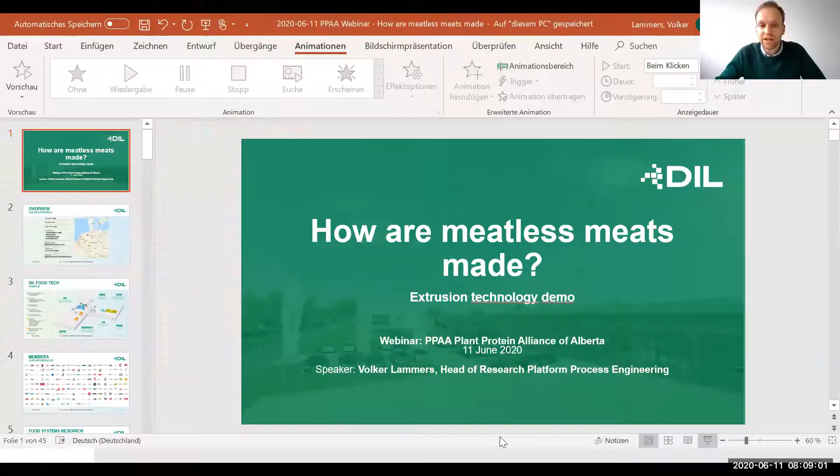Thanks again to PPAA for considering me as a presenter on this interesting topic. I'm pleased to present to you today, and it's great that so many people joined this webinar today.

So the topic is how meatless meats are made, and this presentation will hopefully give you a good overview of extrusion technologies, and how extrusion can be used to prepare meat analogs or meatless types of meats.

I will also share a few videos showing and demonstrating the technology. First of all, I would like to give a brief introduction of DIL, our institute.

DIL stands for Deutsches Institut für Lebensmitteltechnik, which is a non-profit research association located here in Northwest Germany, close to the Dutch border and the North Sea.

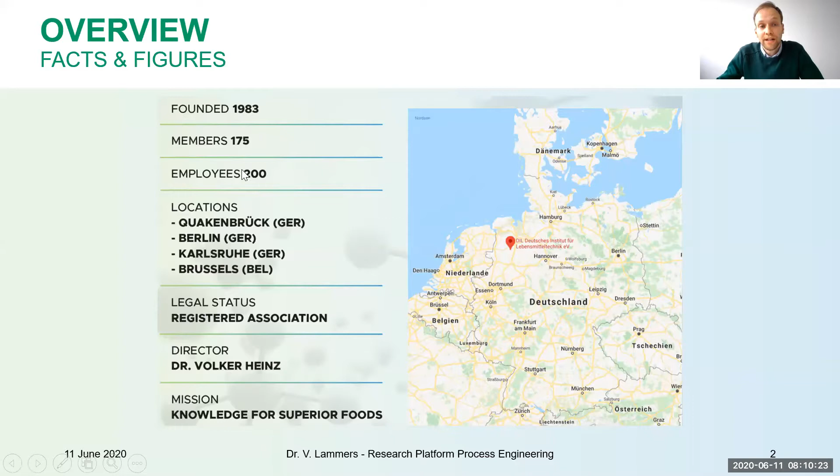Founded in 1983, we have approximately at the moment roughly 200 employees. Our headquarter is here in this lovely little city Quakenbrück.

We also have offices in Berlin, Karlsruhe, and Brussels, and now more recently one office in Calgary - that's Karin. So that's also how the connection to PPAA was made.

Our director and my boss is Dr. Volker Heinz. The specialty about DIL is our legal status as a registered association, and I will show this in the next slide what this means.

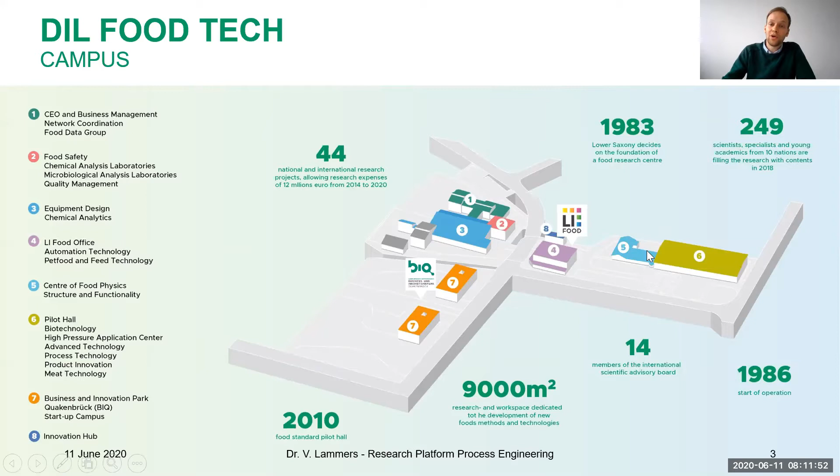Then we have our pilot hall for food innovation and process engineering, and this is where my team is also located.

As just said, we are a registered association, meaning we have roughly 180 members. Those are mainly companies from the food, feed, and beverage industry, but also machinery and equipment manufacturers, and companies from the area around - small, medium companies, but also startups and large enterprises. Everyone can become a member of our institute.

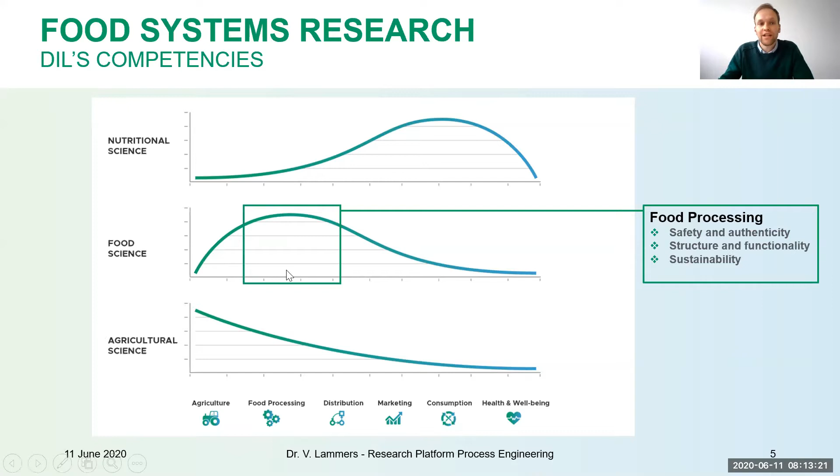So what are the main topics we're dealing with at DIL? It's food technologies. If we look at this graph, basically in the food system we have the nutritional sciences, the food sciences, and agricultural sciences. DIL is mainly located here in the area of food science, focused on food processing. We say, okay, it's everything from the field until your mouth, until you eat it. Then we need to make the link to the nutritional sciences - this is our core competencies.

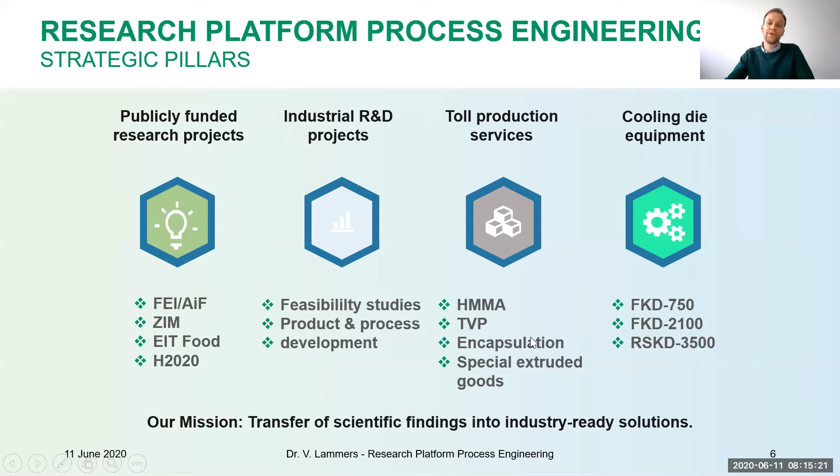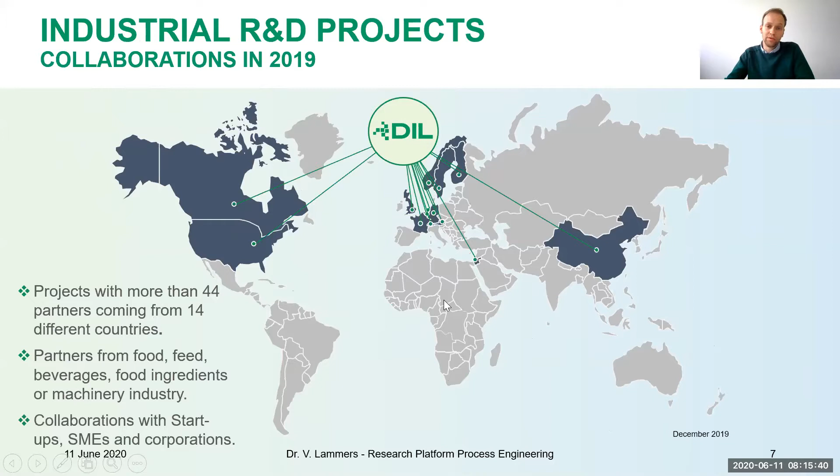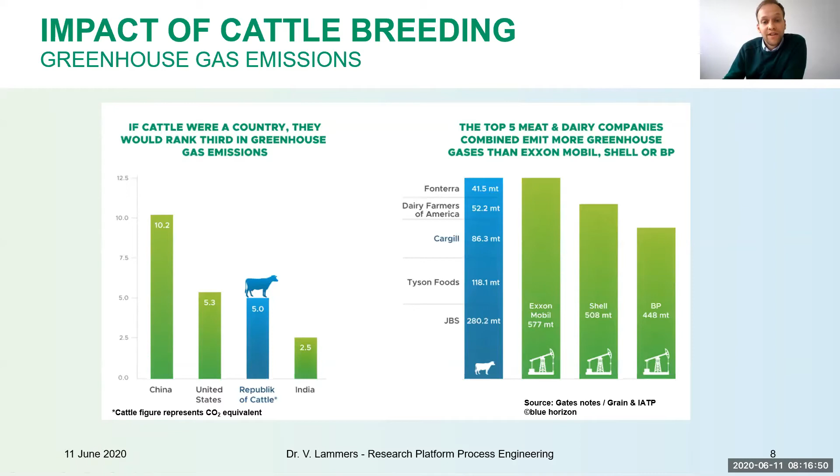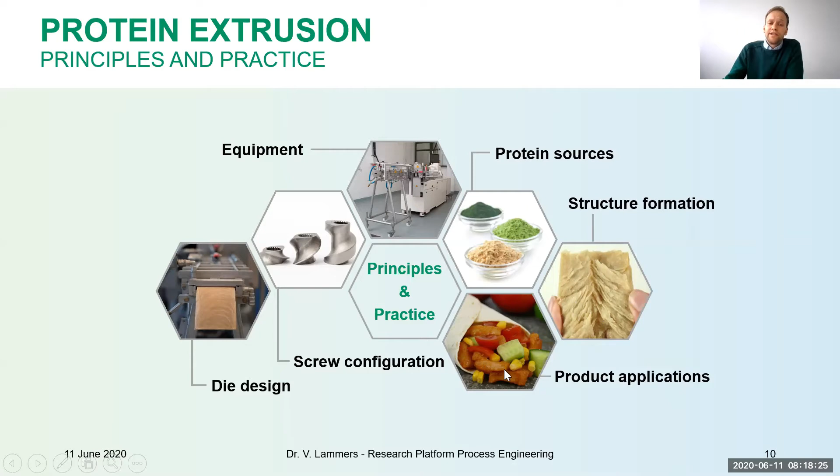But okay, now let's enter the technology part. It will mainly be about food extrusion and protein extrusion. To create a very good, tasty product at the end, we need to know how the equipment works and how the screw needs to be configured in the extruder. Then we need to know the protein sources - there are so many different proteins available, but the functionality is quite different. The die design is important, but also how does the structure look like? Does it more resemble beef, chicken, pork, or other types of products? And then what can we make out of it? This is what I will cover in this presentation.

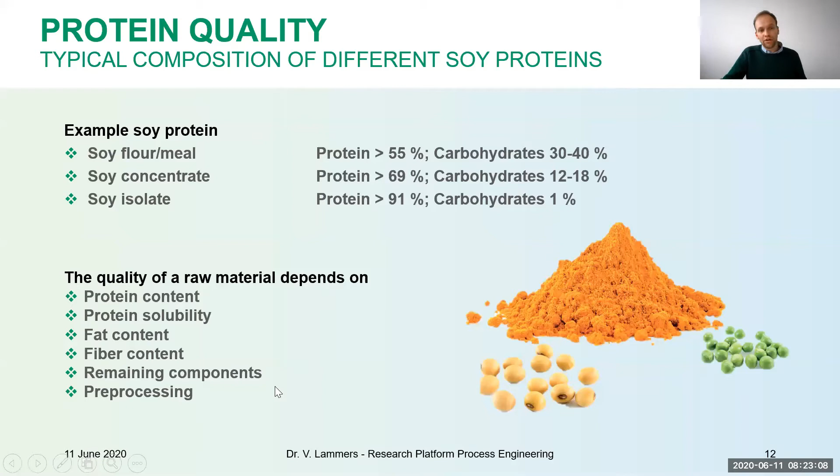Now we make it a little bit different. What reservations might you have about plant-based proteins? Are you worried about the taste, the ingredients, level of processing? Are you concerned about additives or cost?

This is not as clear as the first poll, but I would say it's a good answer: taste is the most important factor. Yes, if the food doesn't taste good, people won't buy it. That is the biggest challenge, that it needs to have a good taste. And I'm not saying it has to taste like meat—maybe the taste can be a little different—but at least it should be a tasty product.

When we're talking about plant proteins, we are often challenged by off-taste. Many of the raw materials are quite bitter and have a typical taste. If you have a pea protein, it may taste a little bit like pea and not like chicken. So those things need to be considered when you create these types of products.

From the engineering perspective, texture is also very important. We need to create similar texture and microstructures as we know from meat, because the texture will have an impact on the haptic properties—do you have the same feeling when you eat it as when you eat a piece of meat? Here the fibrosity, elasticity, and firmness are important characteristics.

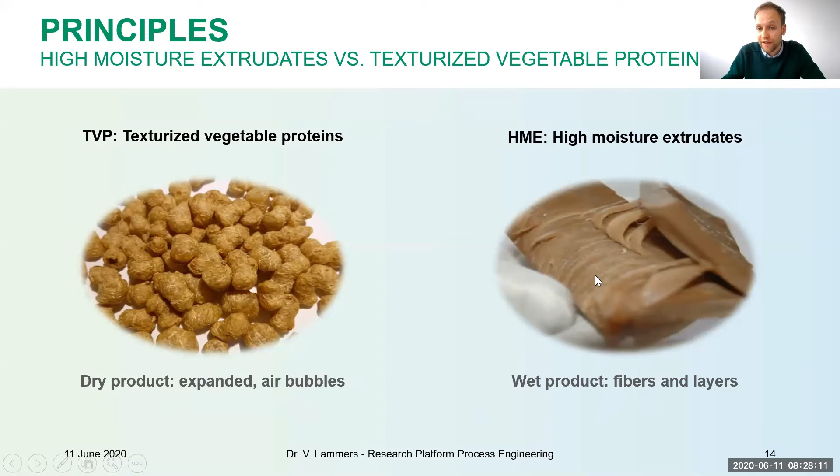The extruder can be very similar for both types of products, and the source materials may be very similar too. You need a good protein source, mix it with water in the extruder, and depending on the water content, you go either to TVP or to HME products.

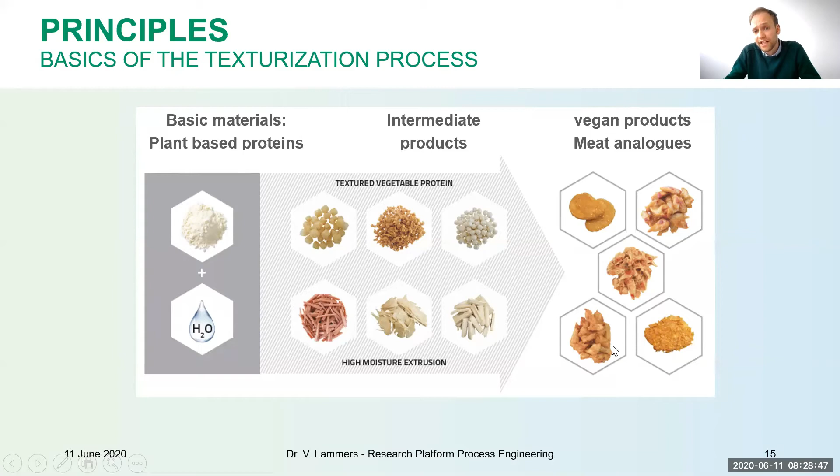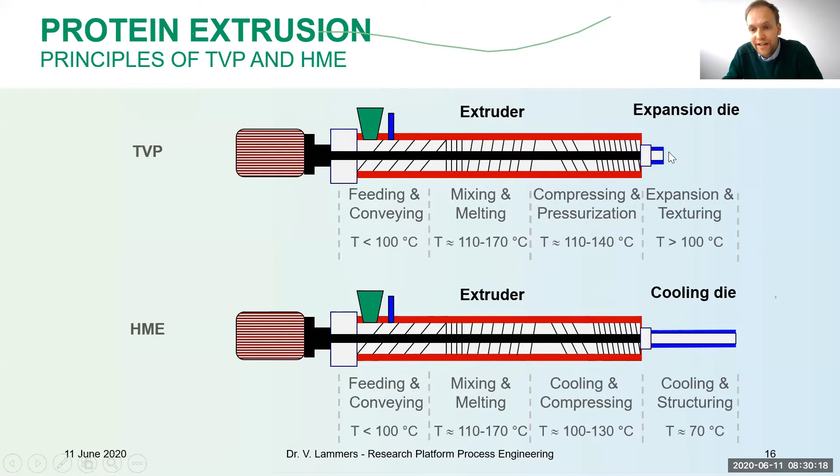For the TVP, we have short expansion dies. So for TVP and HME, it's basically the same extruder setting, but with differences in the temperature profile and mainly in the die at the end. I will show you how these dies look and how the processes work.

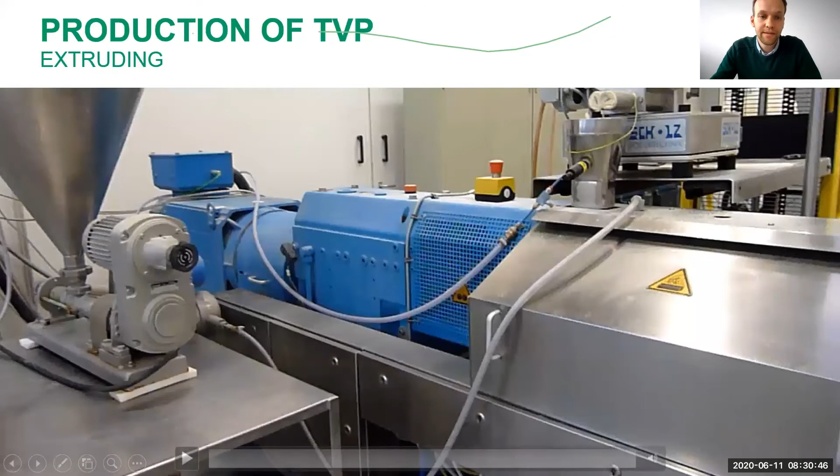Now you have mostly heard everything about the theory, and I will show some videos shot in our pilot plant.

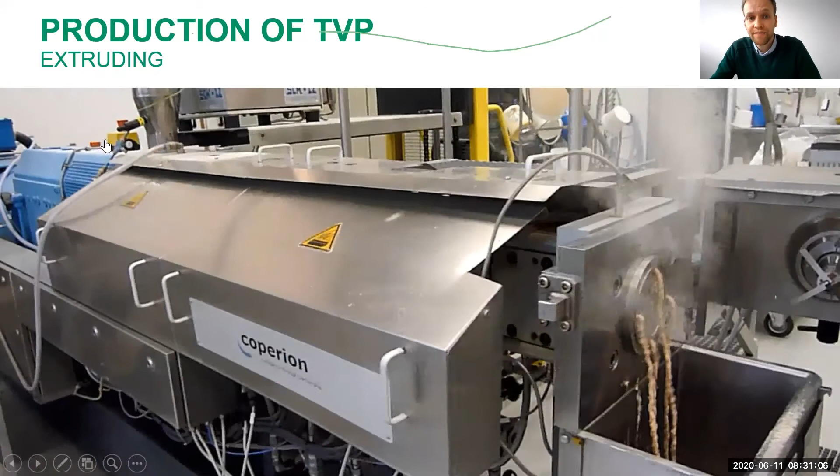Here, powder protein is fed into the extruder, heated up, and then extruded through an expansion die, where an endless strand — or in this case four endless strands — come out of the extruder die at temperatures higher than 100 degrees Celsius, causing them to expand.

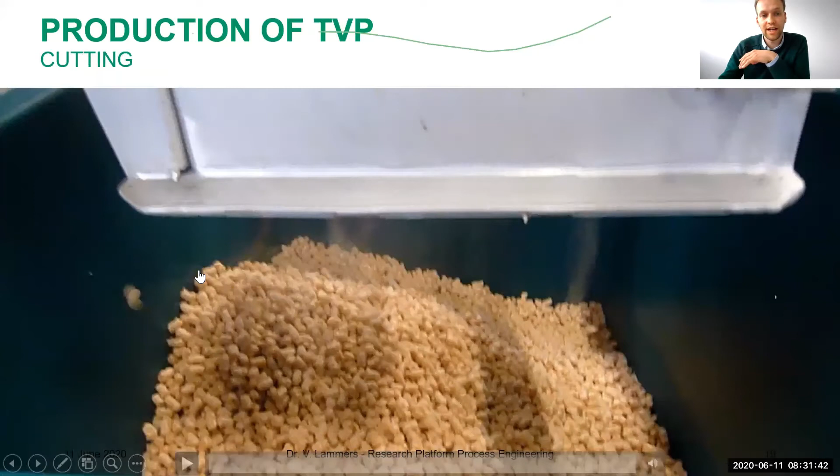So there were the endless strands, and when I put a cutter in front of it, I can create small pieces. This is what it looks like.

This process is also known from snack products, puffed cereals, and breakfast cereals. It's a similar process that is applied.

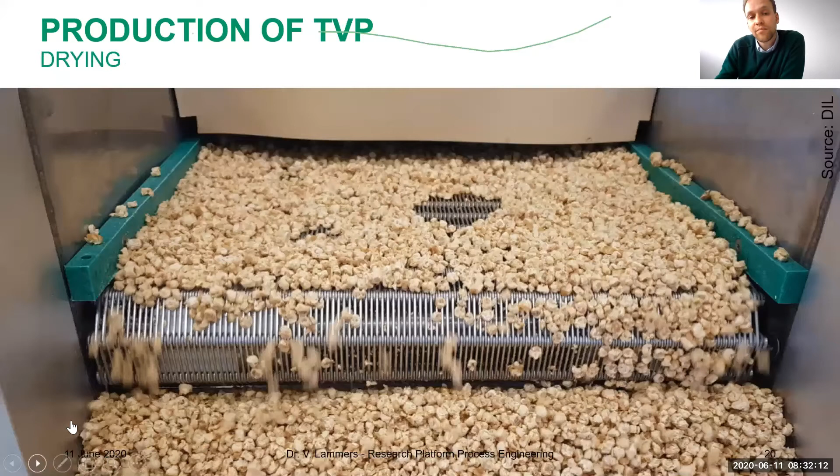In some cases, as you still have some water inside the extrudate, you may require some post-drying. This is a belt dryer where the product is dried afterwards. The benefit is that you end up with a shelf-stable product that you can store for several months, basically.

Here are some examples of different types of TVP that we've prepared in our lab, and I also have them here. This one is soy protein with wheat flour, a mixture that is quite interesting.

Also, pumpkin TVP looks pretty different — it's this one — and there are others as well.

It's not plant-based, but also interesting is insect protein. So we also do a bit of work on insect TVP and use it for burgers, etc.

How do you make products based on these ingredients? You basically put them into water to rehydrate them. I put it into water before the meeting, and then they soak up the water and you get a sponge structure that you can further pull apart.

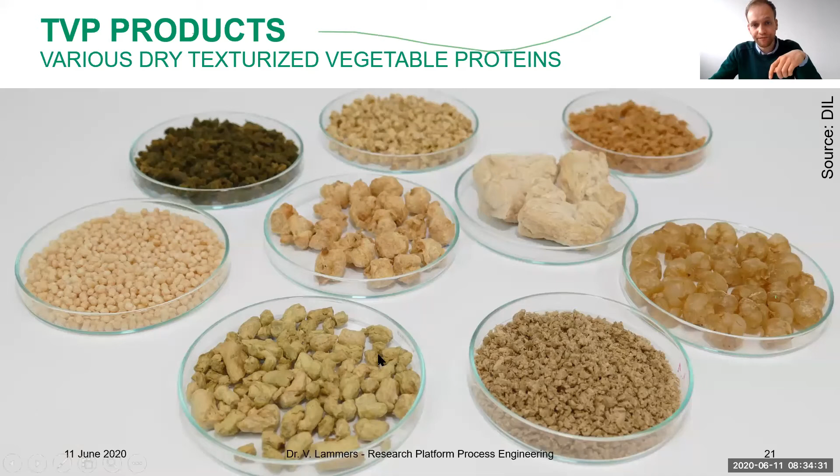This is how it works, and then you have different types with different elasticity. Some may be used better for sausages, others for chicken nuggets or something like this. So you need to know what your final application will be.

Now I will switch over to the wet extrudates, or to the high moisture extrusion. It's basically the same, similar raw materials, mixing with water, with a lot more water, and you create these type of intermediate products, and then you can create final ones out of it.

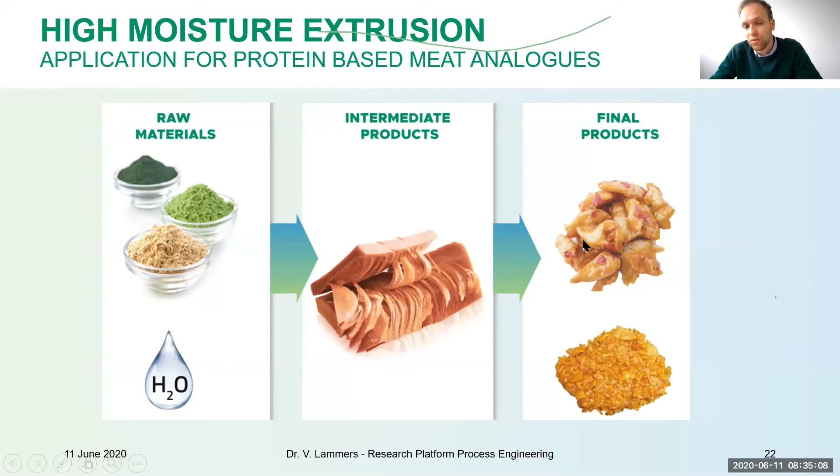And how this works, I will show you first with a little bit of theory. I talked about the cooling dies first. So we have the extruder. This part is the hot part. It's heated up to, I would say, 130, 140 degrees Celsius. And before it enters the cooling die, it's a little bit cooled down.

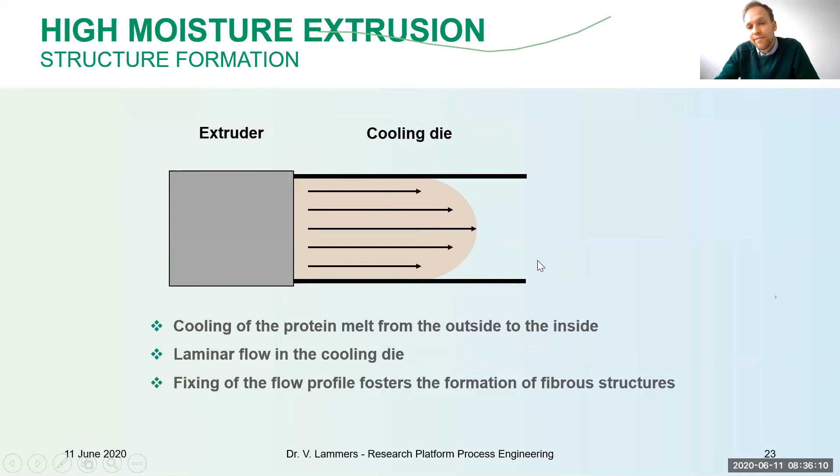In this die, which is basically a heat exchanger, heat is removed by the double jacketed cooling dies, and then you create a similar or laminar flow profile inside this cooling die, and the material that is still flowable at the end of the extruder solidifies slowly, and layer by layer you create the fiber structure. This fiber structure is fixed basically in this cooling die, and at the end you have a semi-solid or solid product with fiber structure.

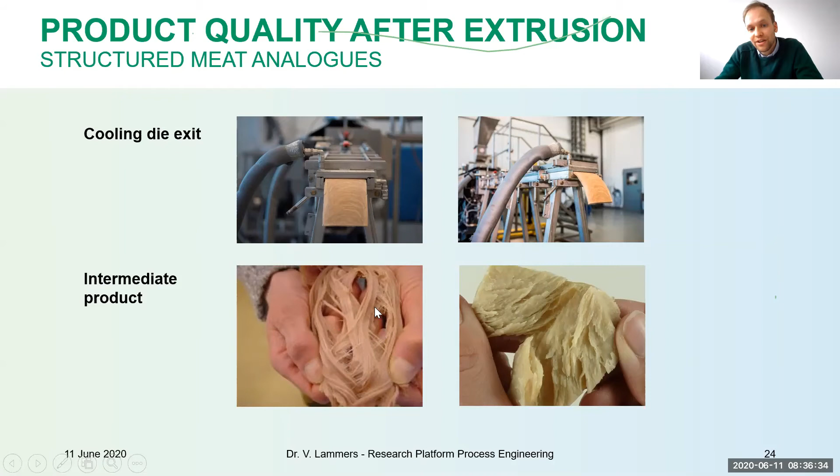Here you see some examples. Here's a cooling die, the top pictures showing the exit of the material. And when you pull this apart, this is always the best test basically to show or demonstrate the fiber structure. But you will see that depending on your raw material, the structures may be completely different.

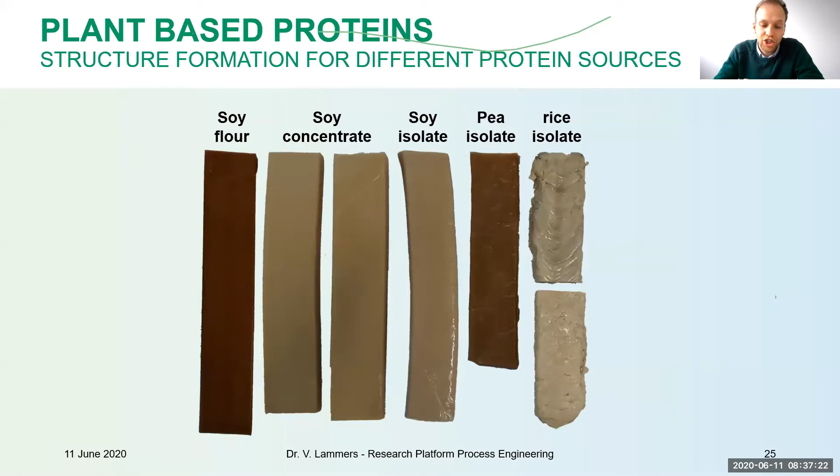So you cannot just simply say, okay, I have a protein, I put it into the extruder, I play a little bit around, and then I get the final or nice structure. No, you have to put in a little bit more of exercises, basically. And if you have a flour, concentrate, or isolate, structures may change. Also, based on this raw material source, you will create different results. So basically you need to modify a complete formulation that is a little bit more complex than maybe just one source.

So in the extruder, you may blend the raw materials, proteins, maybe optionally some starches, fibers, or other materials. You mix them with water, optionally with oil, flavors, or other ingredients, spices, seasonings, for example. Then after the extruder, you may cut the product, and this is what we call an intermediate product that can be further processed into final products.

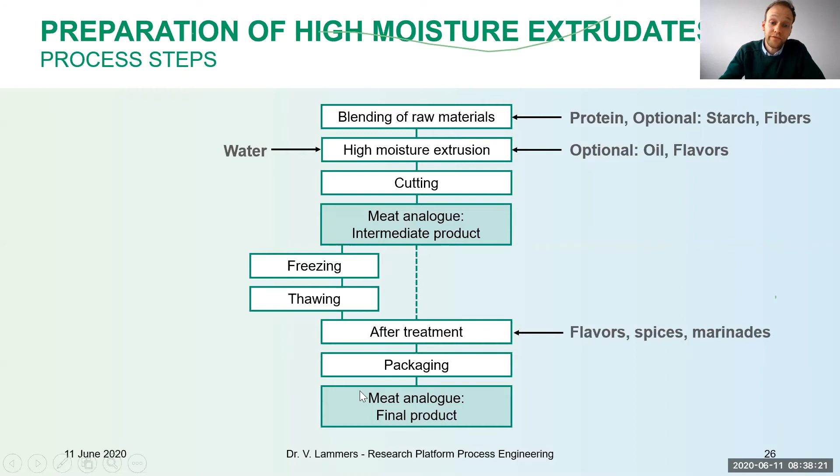So to stabilize them, since they are not shelf stable, you may need to freeze them and thaw them, or you directly make the treatment afterwards with some other spices, marinades, or panades, or whatever you like. And then packaging, and you have a final product.

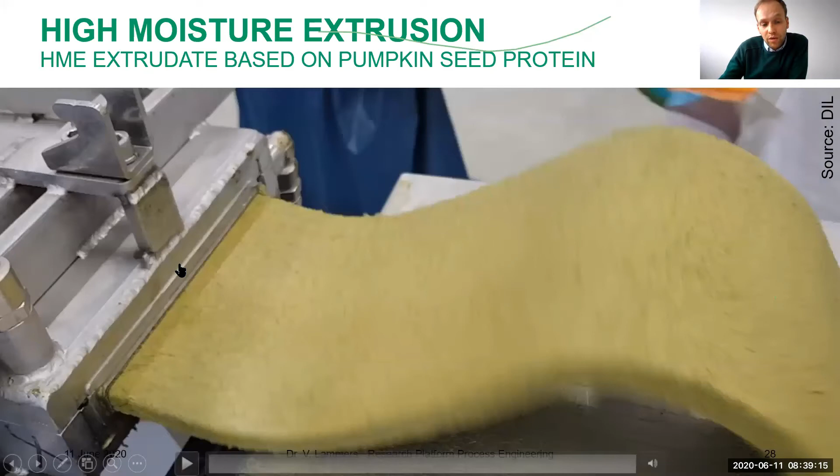other ingredients are of interest. One of my favorites is pumpkin seed protein. I just showed the dry variant, so now you see the wet one. And it has a green color. Maybe not everyone likes that, or it does not look from the color like meat, but it has a very nice structure and the taste is good.

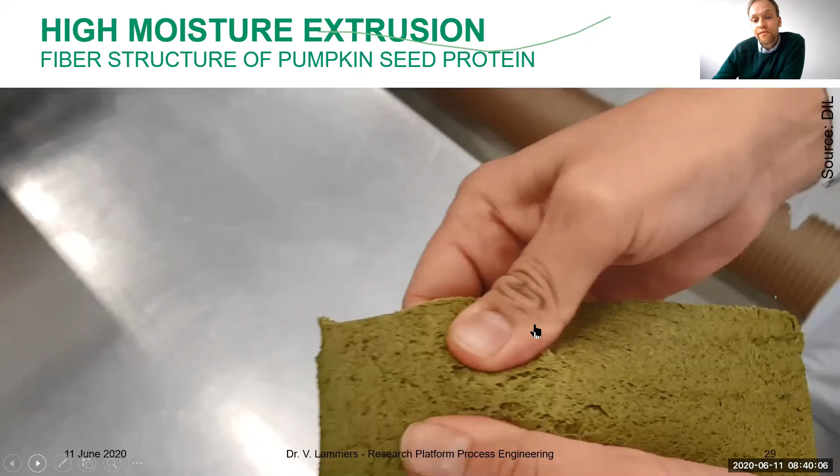And what I like the best is that it's really a minimal processed byproduct from the oil production. So this really gives, from my perspective, added value to this food system. And here you see the structure. You see the fibers, and also when you eat it, you have a similar bite to a piece of meat.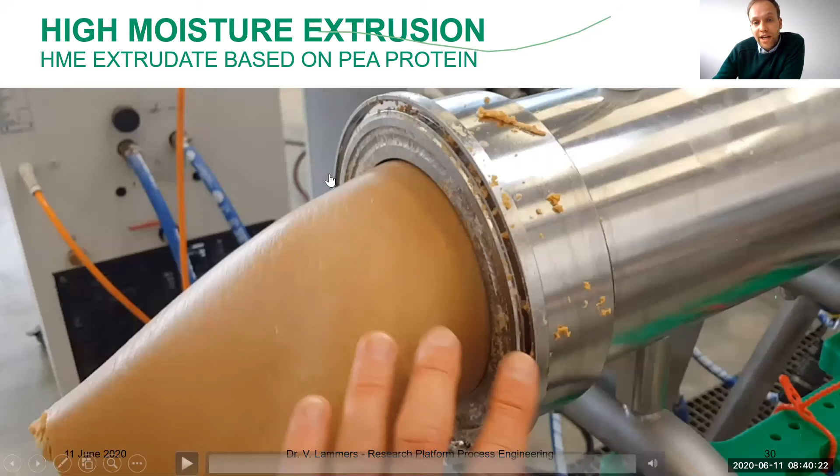And here we have a different type of cooling die, which is, I would say, one of our latest innovations to increase the throughput, because you also always need to consider the throughput per hour, basically, to have a cost-efficient and affordable process. And here we can go to much higher throughputs. This is a pea protein that is extruded.

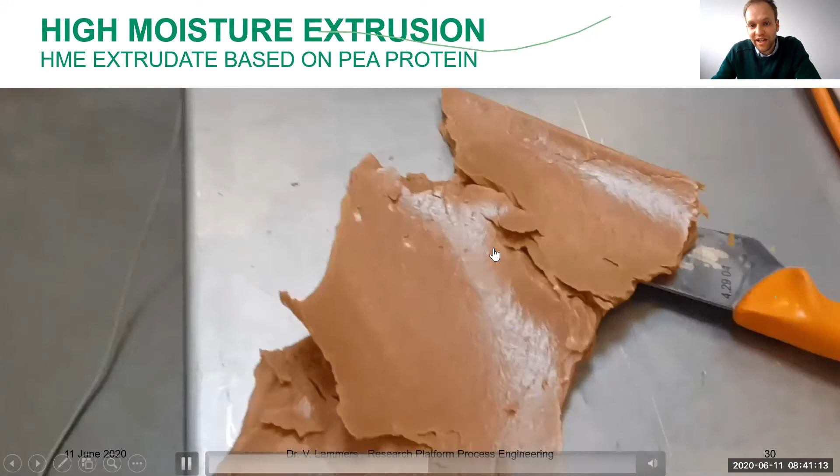You will see, okay, this is now more like an annular design shape, and here you see a little bit the fiber structure. I made this video last week, and I just tried it with one hand because in the other one I had the camera, but you see here the fibers. I think I have a better one in this image.

See the long fibers - I think the beauty of this process is that you really have only the protein source with water plus the extruder, or plus the technology. So it's a very clean label product until this point.

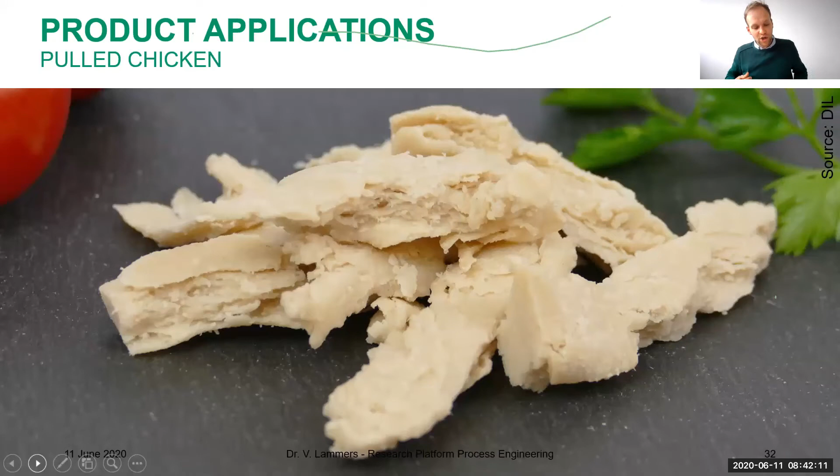We would be curious what type of products you're mostly interested in - like a tie between beef and chicken. Oh yes, the chicken I have here. Some example - I think chicken or the HME process is very suitable for chicken process or for chicken analogs.

It can be on a soy basis or pea basis or others. When you talk about chicken, chicken has a white color, it's very light, so you cannot use protein sources that have a very dark color from the beginning on. I mean, you could work with some additives like titanium dioxide or others, but this may not be desired for certain reasons.

I think beef is also very challenging but interesting, and fish - we see an increasing interest over the last few months. So many are talking about meat alternatives. Many products are on the market, but more and more fish products come. Very interesting - thanks for the poll.

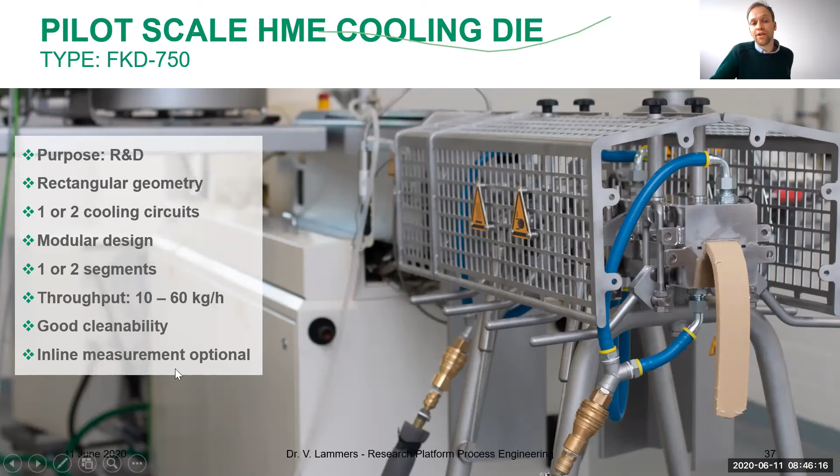We can also optionally include some inline measurement, which may be interesting from a research perspective. We have a larger one where we also showed a few images - this is the FKD 2100. FKD here stands for flat cooling die, and the number gives an indication on the cross section of the die, because it's an indicator of how much material you can put through the machine.

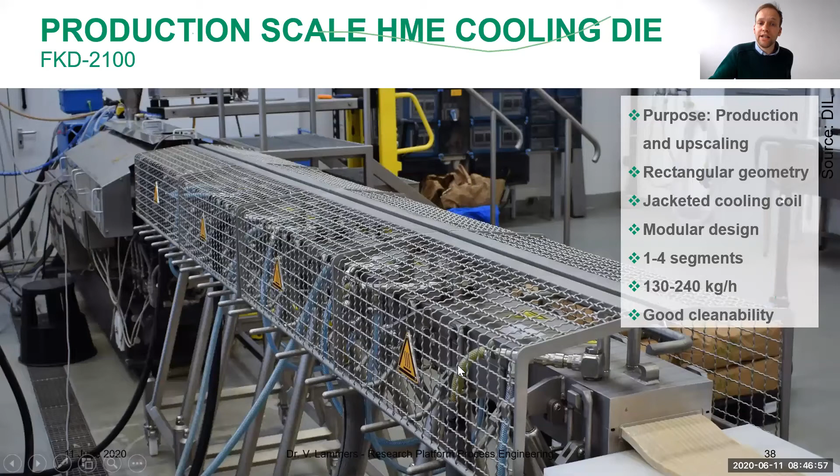It is modular, can be used up to four segments, and we have a higher throughput of between 130 and 240 kilograms per hour. The latest die we've developed has this annular profile, and here we can go up to 500 kilograms per hour. This is a point where we would say it makes the HME process really affordable and profitable.

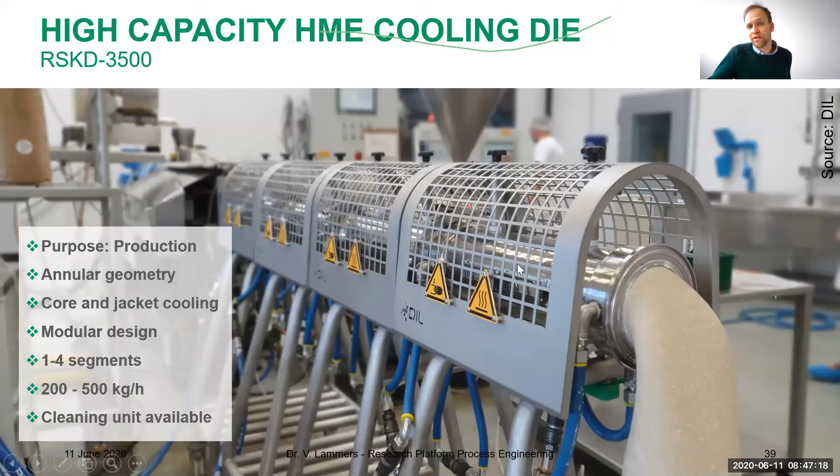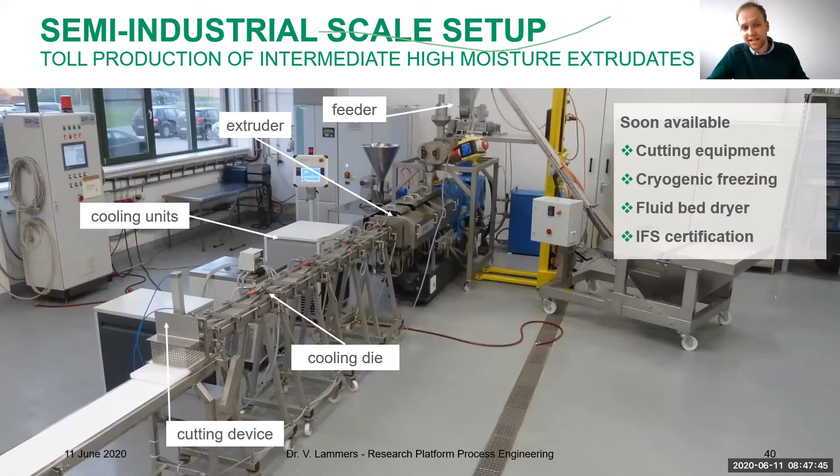This is a figure of our pilot plant. Here we have an extruder, cooling die, and cutting equipment, cooling, and now we will also have freezing, cryogenic freezing, because freezing is also important. If you have the wet type of product, you need to stabilize it until it gets to the supermarket.

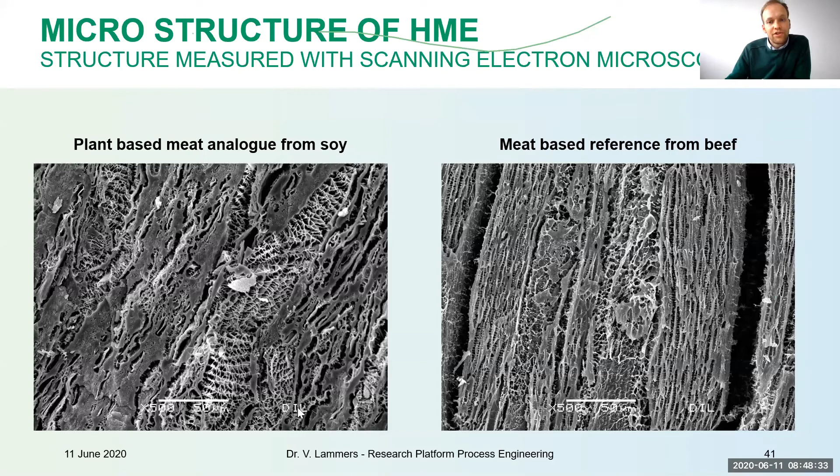So, this is really a microscopic image and does not tell you about how good it tastes, but it gives an indication that we are able to create similar structures by this technology. We also developed some tools to determine the fiber index and to investigate the fibrosity, how it looks.

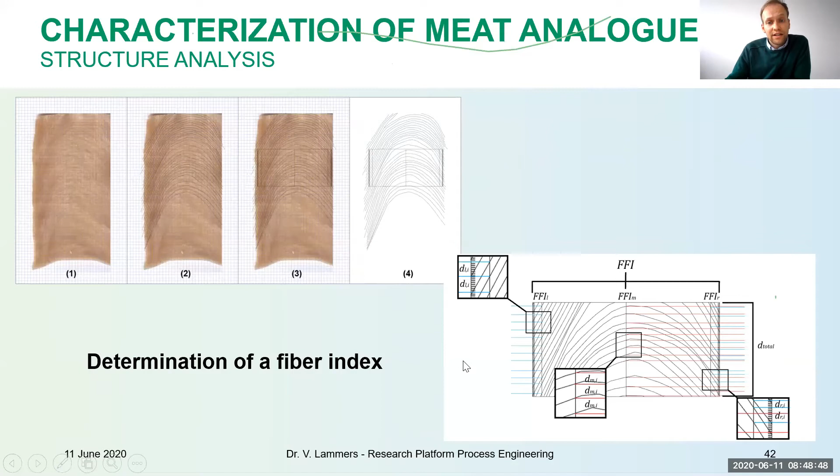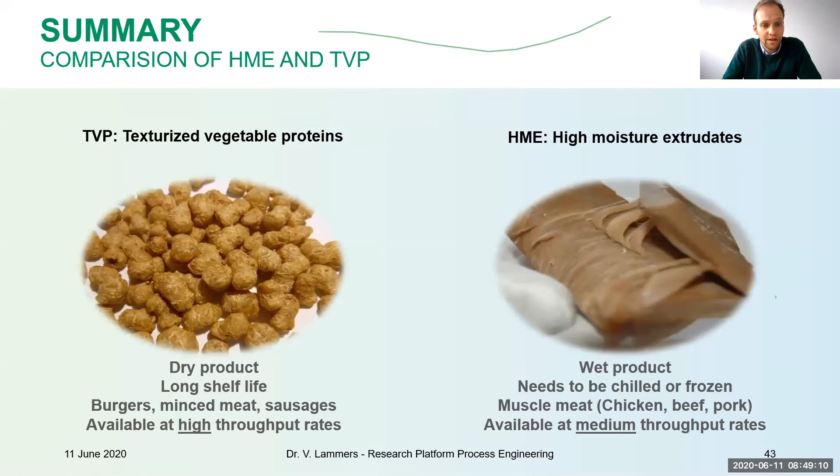With this, I come to my conclusion and summary, just to briefly compare the two processes I've presented. We have the TVP here on the left, the dry products, and on the right the HME products. I would say the dry ones are easier to work with because they have a long shelf life and can be very nicely used for burgers, minced meat, and some sausages. They are also a little cheaper because the technology is available at high throughput rates - there are machines available with up to 1.5 tons per hour.

The HME is a little newer technology where we have a wet product that needs to be chilled or frozen or somehow stabilized, but it resembles more like the muscle meat of chicken, beef, and pork.

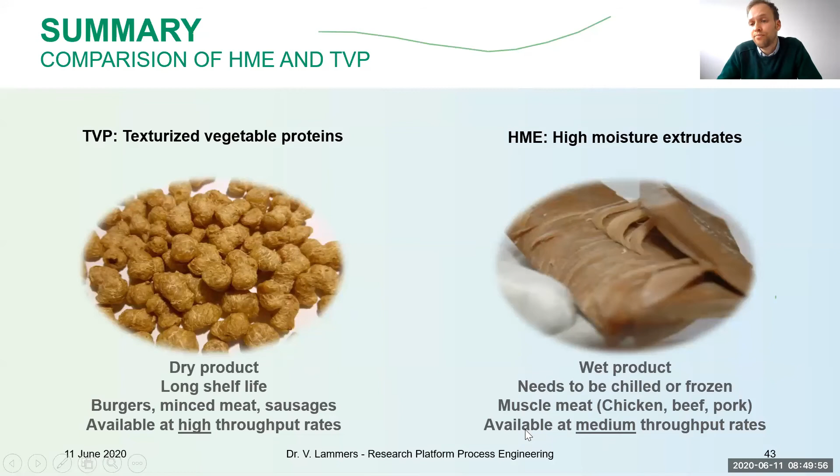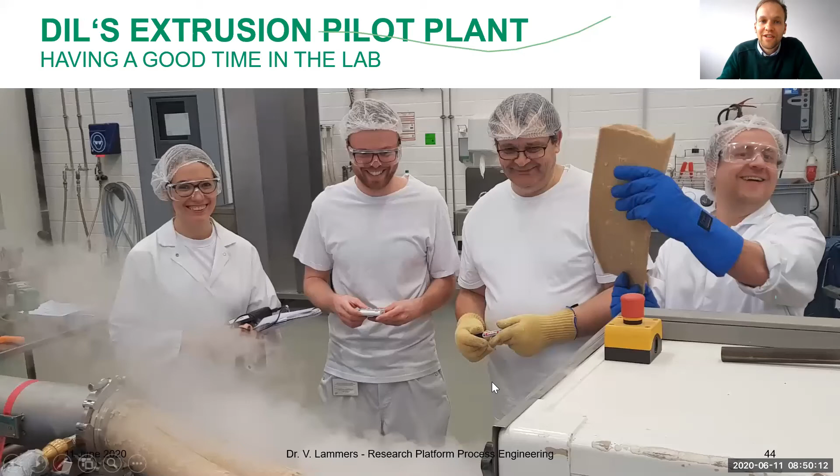At the moment it's available at medium to high throughput rates. This is a figure of my teammates in the extrusion and process engineering team, experimenting a lot and having fun in the lab.